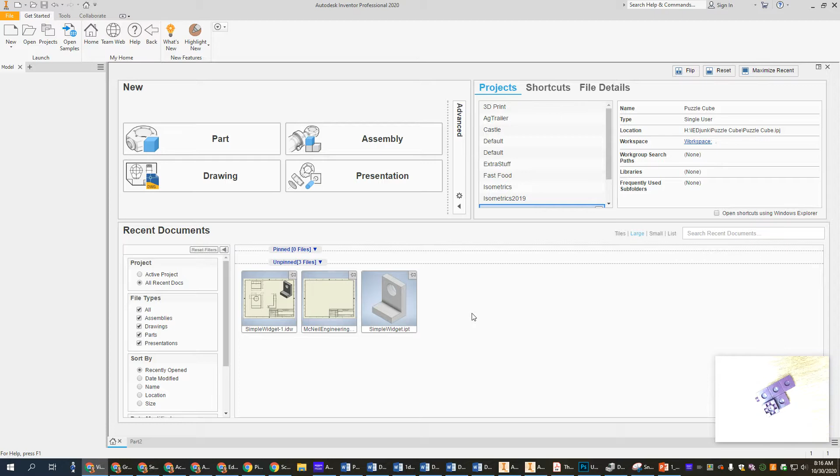All right, today we're going to make a puzzle cube, or a puzzle piece for our puzzle cube, and I'm going to use a little bit of what's called subtractive modeling, which just means we're going to subtract things away instead of adding things on. So we're going to make this purple piece that I have.

Again, we make a new part. When you have your new part, click on the pencil. Gives me a new part. I'm going to draw the front, this is my front that I'm looking at. So I'm going to click on the XY plane, and I'm going to draw this bottom section.

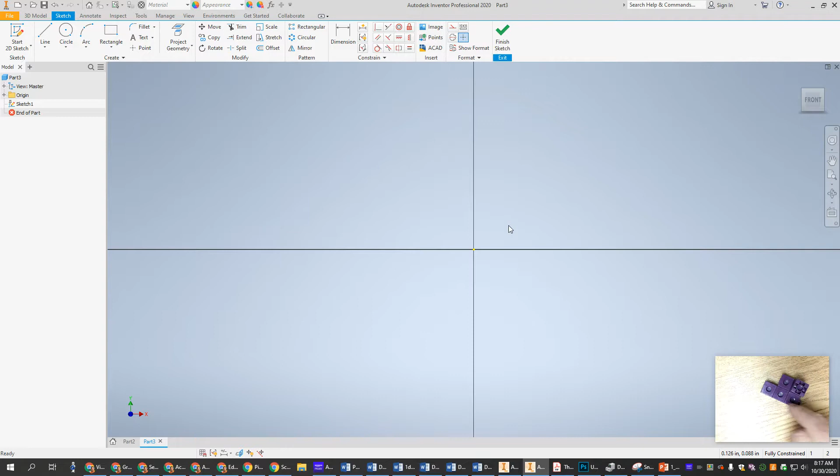So it's 3 across, 2 across, and it's kind of too high. But I'm missing this corner. I'm just going to draw one big rectangle to start with, so I'm going to pretend every piece was in there. It's pretending kind of like that orange one is there, but it's going to disappear.

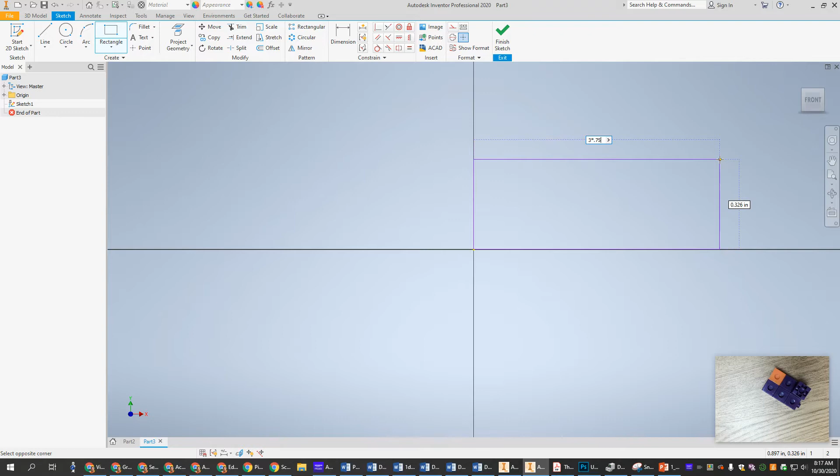Okay, so it's 3 across and 2 high. So 3 across, 3 times 0.75. And then my height is 2 times 0.75. And again, if you click front, it'll bring it down. And now I have that big rectangle.

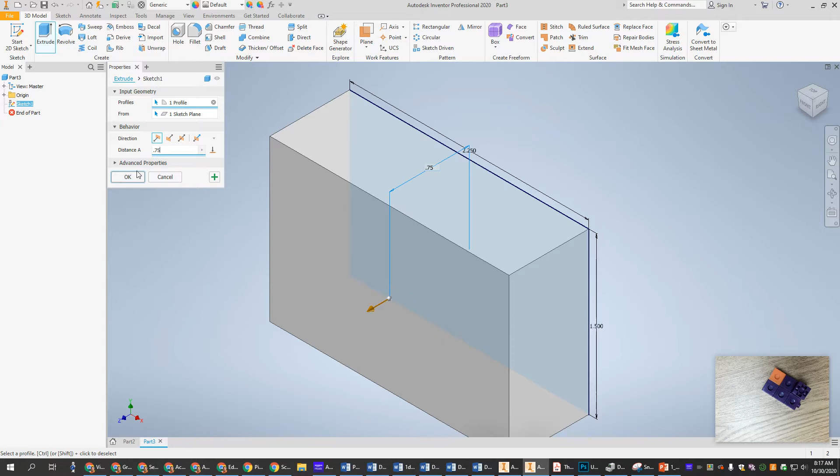I'm going to finish that sketch, and I'm going to extrude it. Make it bigger. Now it's only 0.75 thick because we have cubes here. And now we have that piece.

Okay, so it's like that whole piece, the purple and the orange put together. But we want to get rid of that orange piece. So we're going to make a new sketch on the front. Right click and say new sketch. And now we have to get rid of that orange corner.

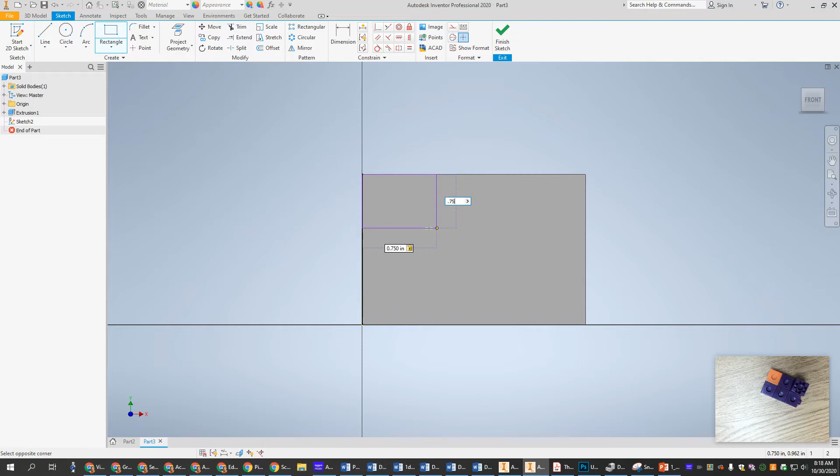So we're going to create a new rectangle. We're going to start it up in this corner where the orange piece is, and the orange piece is 0.75 by 0.75. Okay, enter, and now you can see we have that orange piece drawn, and now we're going to get rid of it.

Okay, so we're going to finish that sketch, and this is called subtractive modeling because we're going to cut stuff away. So we're going to extrude again. We want to extrude this piece, but you can see how it's extruding out. We would like to cut it back through.

So the output, this is joined, but we also have cut. So the second one over, these look like little printers. The second one's cut. If I click that, it kind of knows I have to go the other way because there's nothing to cut out in front. It's all behind, and it cuts it away.

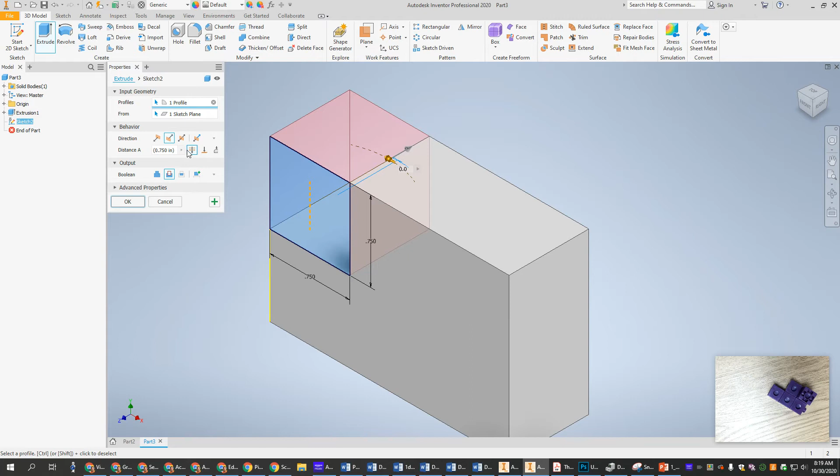We want to cut it back 0.75, or you can also say through all. Through all will just go as deep as you possibly are. Okay, but either one works. And you say okay, and now when I look at my piece from the front, it looks just like this piece I have down here sitting on the thing.

Now we'd have to do some additive because we have to add this little piece on the front. Since we're here, I'll go ahead and do that. So we're going to make a new sketch on this front. We're already on the front, or you can look at the isometric.

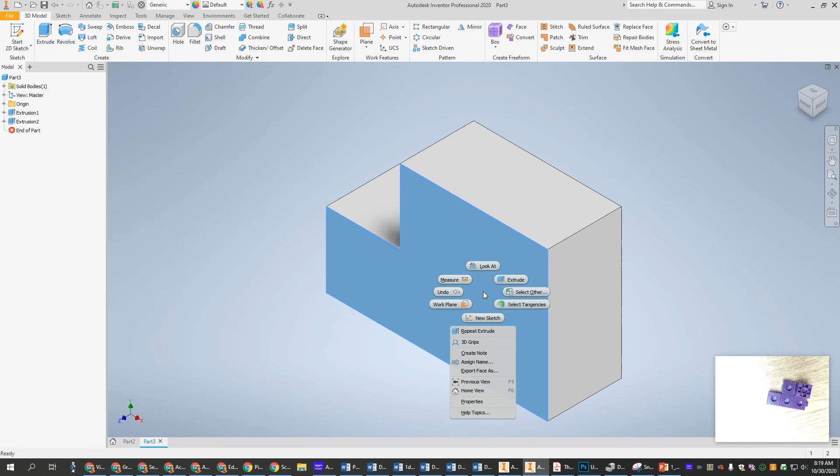Again, we're going to right click and say new sketch. Click on front to zoom it down to the middle. My rectangle tool, I click on this upper right corner, and again I want to put a 0.75 by 0.75 piece. I finish the sketch.

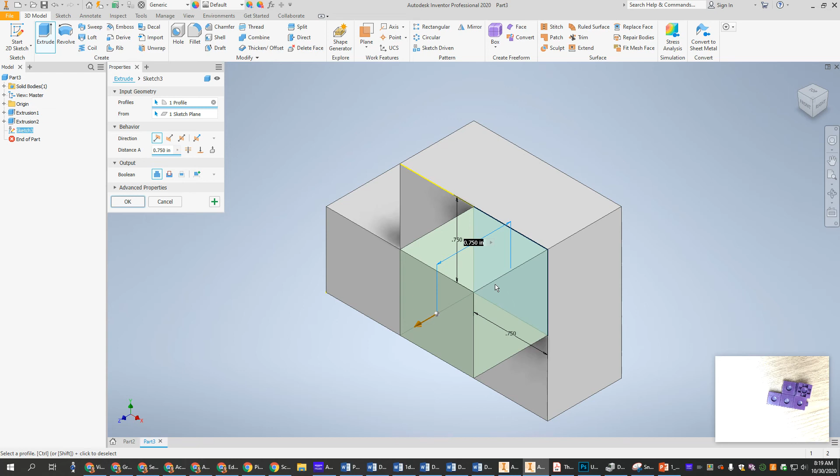I click extrude. It extrudes out that piece. It already knew that's the only piece I have that I just drew that I could extrude, and it already knew that I was 0.75 because that's what I did before. So Autodesk Inventor just guesses what you think you want to get. And then you click OK, and then you're done.

It's what it looks like, right? From the front or the right, or you can go back and look at the top. Okay? And that's what they look like. That's all there is to it.

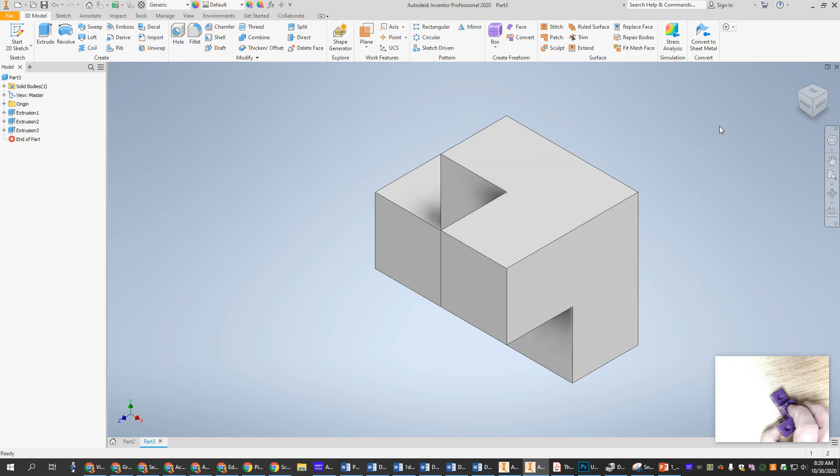Again, if you wanted to color it, remember you just go here, right? If you click on the corners, it'll color everything, and we want purple, which is about here. That's kind of blue, isn't it? Get more purple. There's purple. And hit the check mark, and you're good to go.

Again, save your part. Save your parts. The name, I would call this one purple. And then we can keep track of what things are. That's all there is to it.